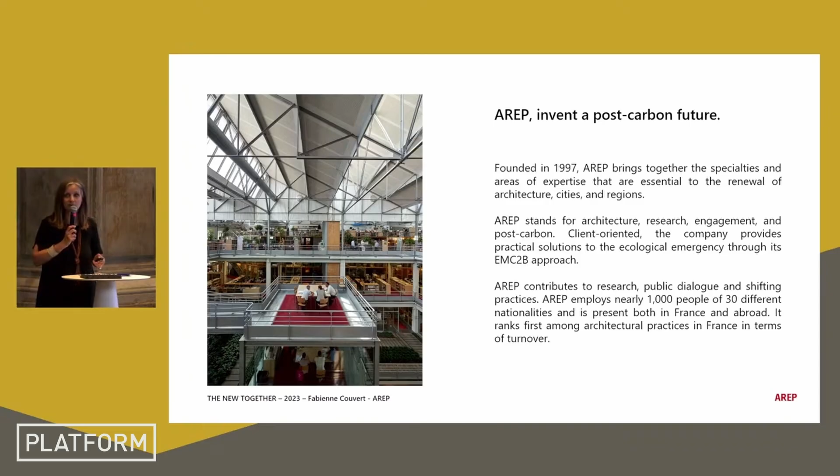At Arep, we invent and try to invent a post-carbon future. We are almost 1,000 people, all over the world. We are architects, engineers, urban programmists, environment specialists, etc. We are 30 nationalities, with more than 100 people in Asia, and the rest in France, in Paris, but in other towns too.

We are organized around a community of activist leaders, Raphaël Ménard and Philippe Bihouix, and we try to find practical solutions to the big challenge of ecological emergency. In particular, with our EMC2B approach. I will explain this EMC2B later.

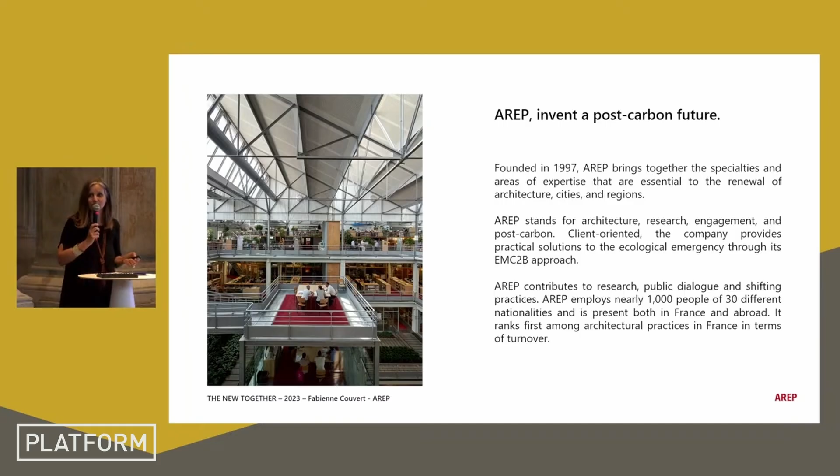So I will speak to you today about our project at train station Pont de l'Alma in Paris. It's a station like a pavilion, and the pavilion is a continuum of universal exhibitions, from the old together, a project at the heart of the major universal exhibition.

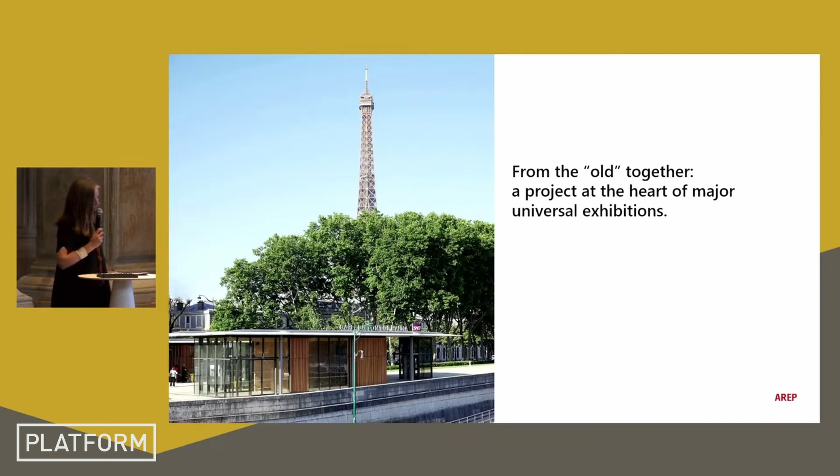The Pont de l'Alma station is a station of the RER, Île-de-France rail network. It's located in an exceptional site listed as a UNESCO World Heritage Site, but also at the heart of the major universal exhibition. I can show you a drawing of the exhibition. This sector hosted major events, and you can still see monuments or buildings that remain now: the Eiffel Tower, Grand Palais, Petit Palais. These were constructions for this exhibition.

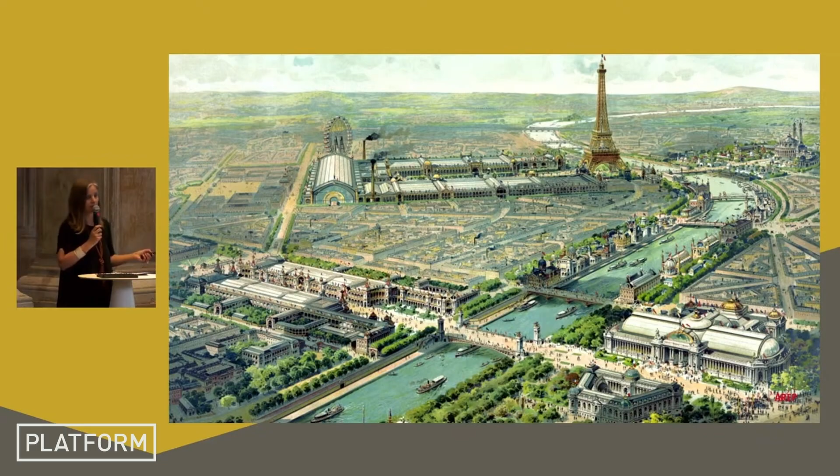I just want to explain a little bit of history. At the beginning there is a line, a train that goes to Champ de Mars for the first exhibition in 1867, only for foods, goods, and materials for the first exhibition.

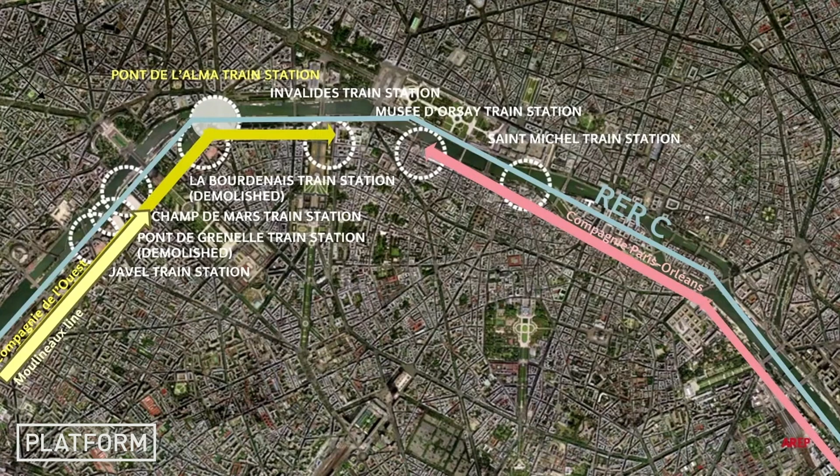A few years later it began carrying passengers, until the second exhibition in 1878. For this occasion, Juste Lisch, an architect, built a train station right at the foot of the Eiffel Tower, before it existed.

And later, la Compagnie de l'Ouest, the dark yellow arrow, extended the line until Invalides, so they demolished the station. For this occasion, the town of Paris imposed a trench track.

At this occasion, Juste Lisch, the same architect, built 4 identical stations: Pont de l'Alma, La Bourdonnais, Pont de Grenelle, and Javel. There was another company, the same year, 1900, that extended the railway until Orsay, which is now a very great museum.

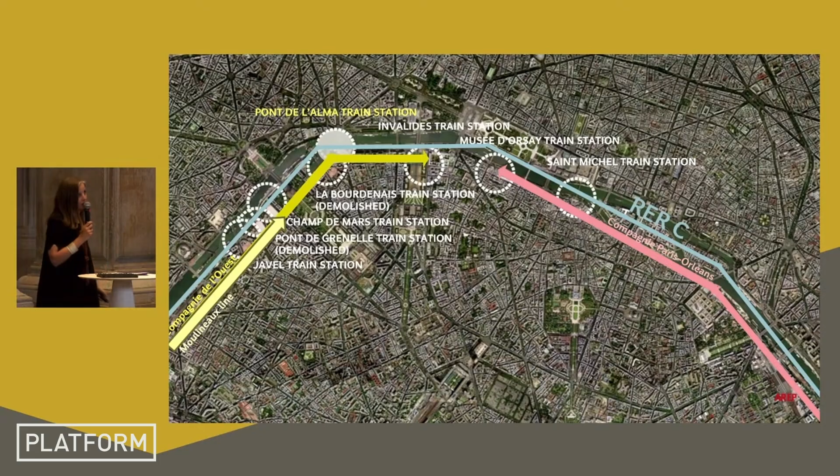It was only in 1979 that the transport train and the two transport networks connected together.

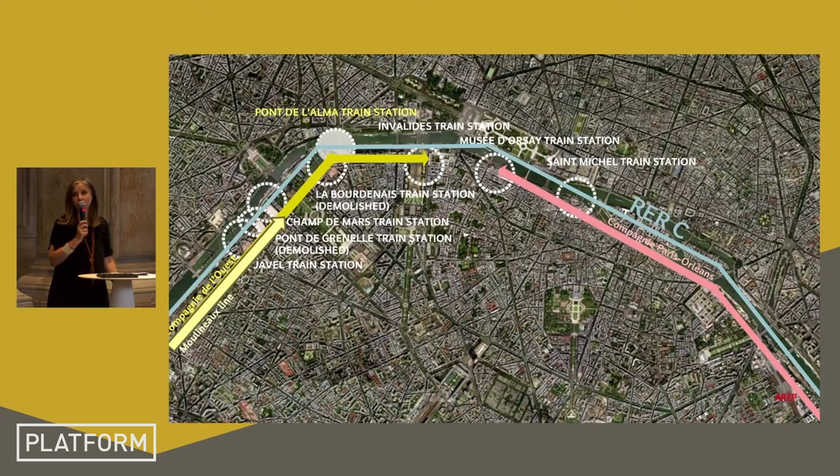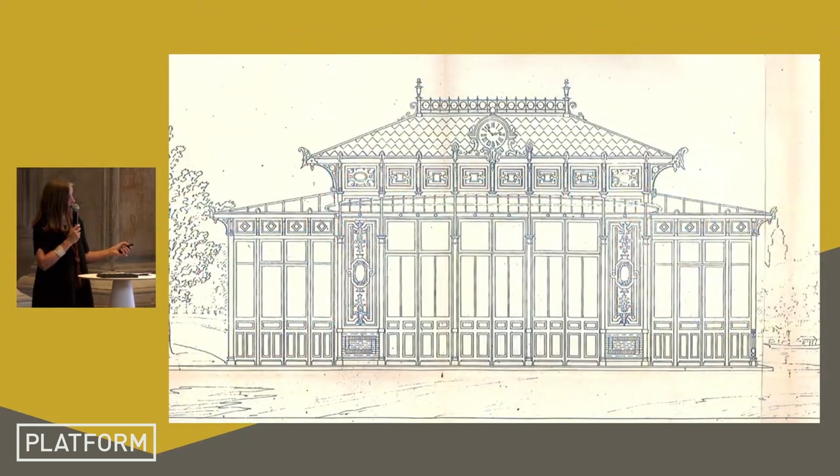This is the drawing of the architect, Juste Lisch. All of the stations were the same. It was a bridge building because the platforms were on the track, so the building had a first corps and a secondary corps to go downstairs on the other side.

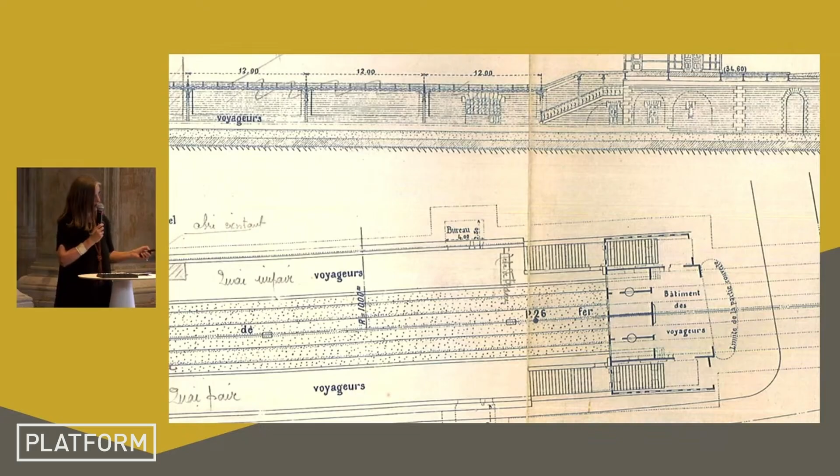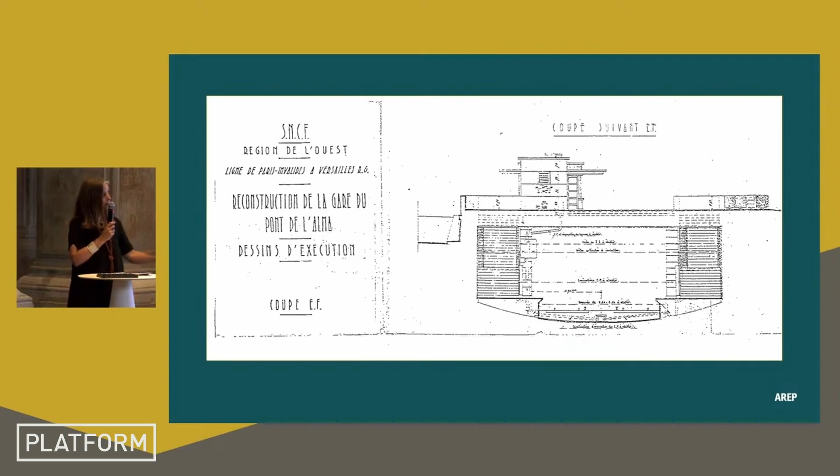In 1937, they covered the platform, the network, and they demolished the building and built a smaller one. So we worked on a new station at the same place. There is still the platform, just in the ground, but we need another pavilion.

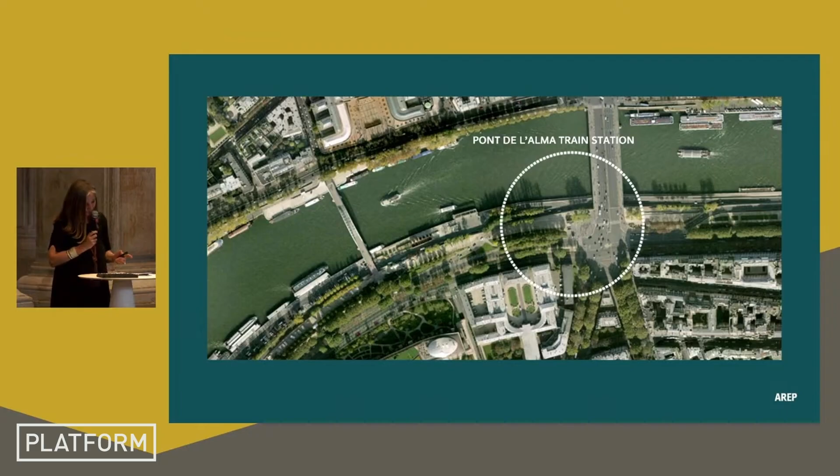It is a very emblematic site, I told you, just near the Palais de l'Alma, the Orthodox church, and we can see the two pavilions we realized. We made two pavilions because there is a promenade across them, which is very important to preserve.

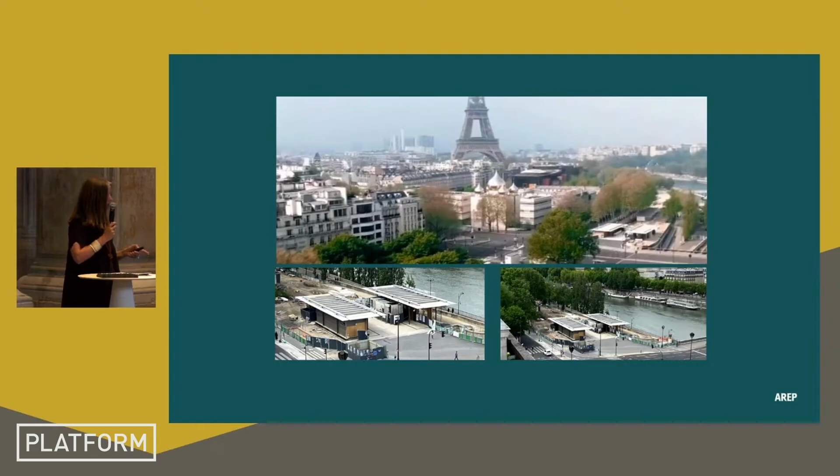So you can see the elevation. We want to create a legible and visible station, even if it's small, but at the same time, in this very sensitive place, we have to be discreet.

We have designed two symmetrical pavilions on either side of the promenade, and this is one of these pavilions. It is a large roof realized in concrete and metallic structure, and just here you can see a box with wood structure and wood facade, with only services for the transport operator and a cafe.

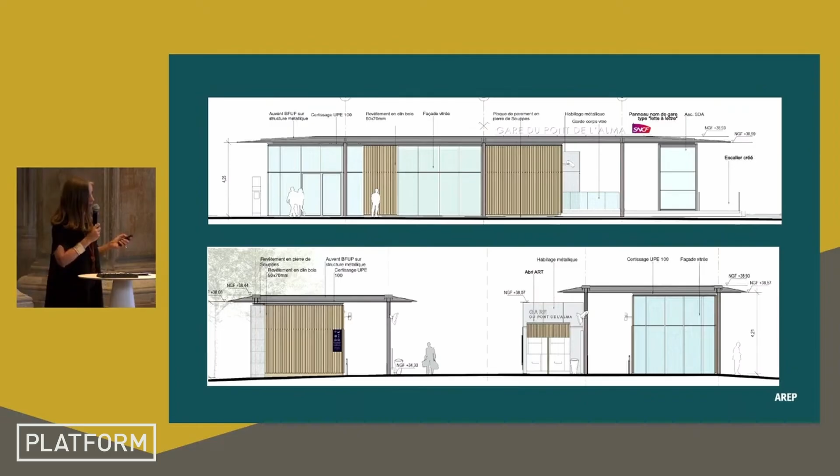Now this is the EMC2B method I want to explain to you. We take action to push ecological transition forward with practical solutions. E is for energy, M for materials, C for carbon, C for climate, and B for biodiversity. The EMC2B approach is the prism through which AREP analyzes its projects.

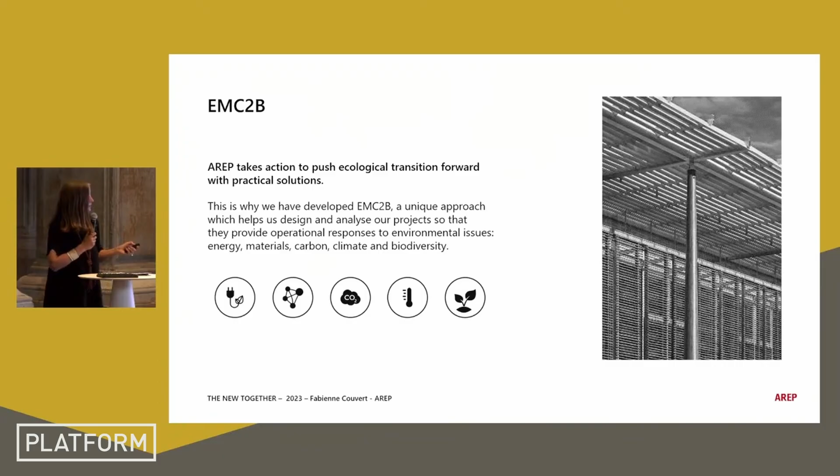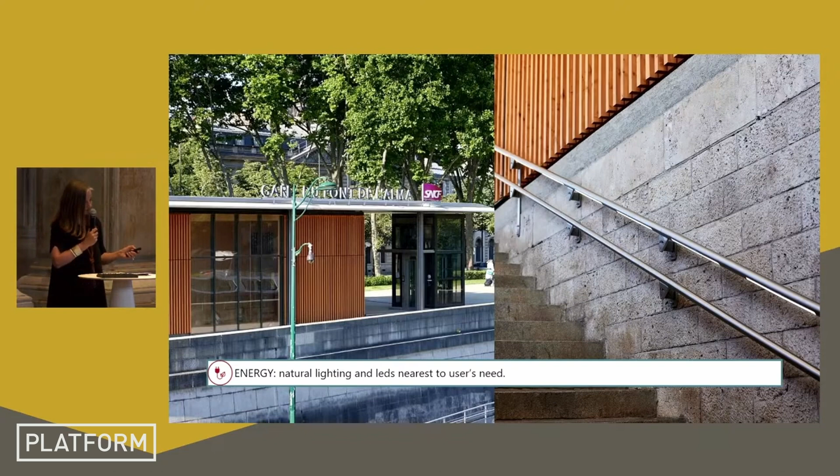For instance, I can explain energy, which is very simple in this project — some aspects are harder, but this one is very simple: natural lighting and LEDs nearest to the user needs. For materials: economy of materials, natural materials, and no covering materials. That's our policy.

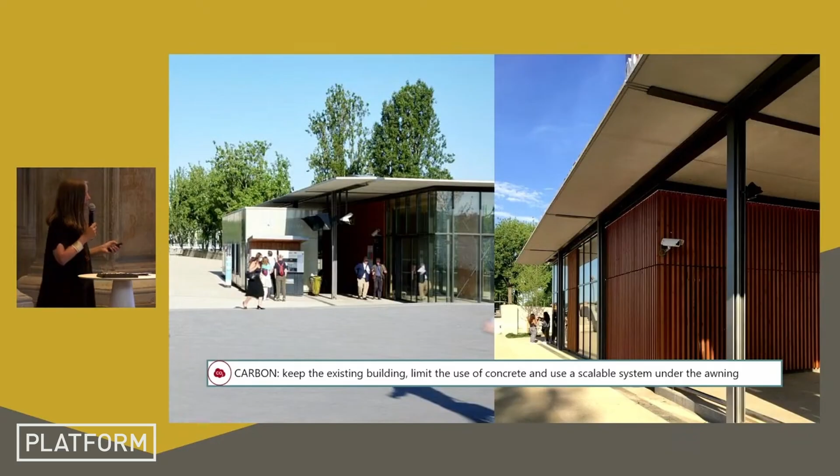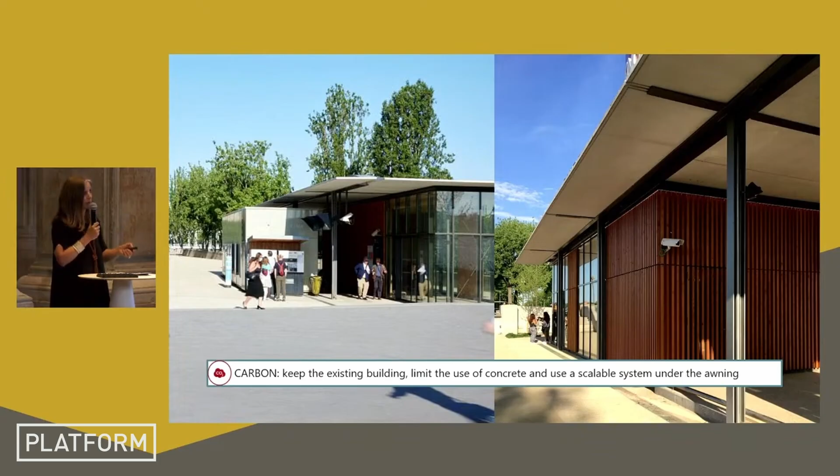For carbon, it's almost the same, but to keep the existing building — because the old pavilion is inside the metallic skin, so you can see it — we let it remain in place because there is a technical room inside. There are two different structures: the structure of the roof and the wood structure of the services. So you can make an evolution if you want and transform it into a music kiosk, for example.

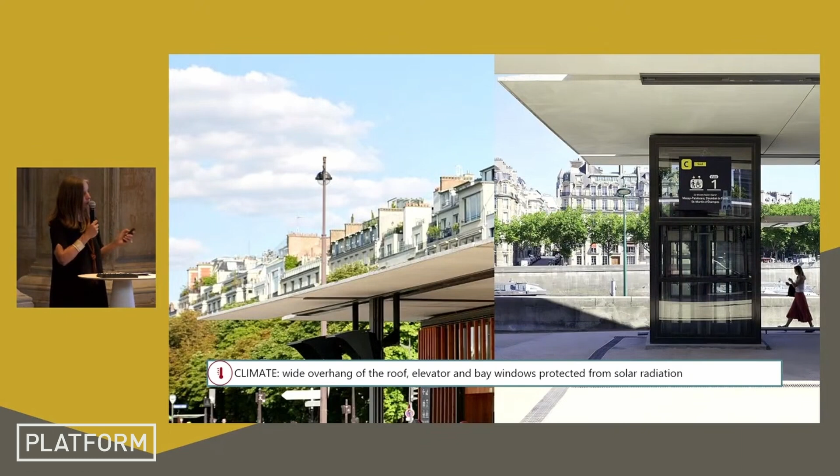For climate, we have a wide overhang roof to protect windows from solar radiation, but also from rain. And for biodiversity, we created 450 square meters of vegetation and planted 35 trees.

This is an incredible station because it's a daily station for Parisians, but there are also a lot of tourists, because you can go to the Château de Versailles from this station, but not by boat.